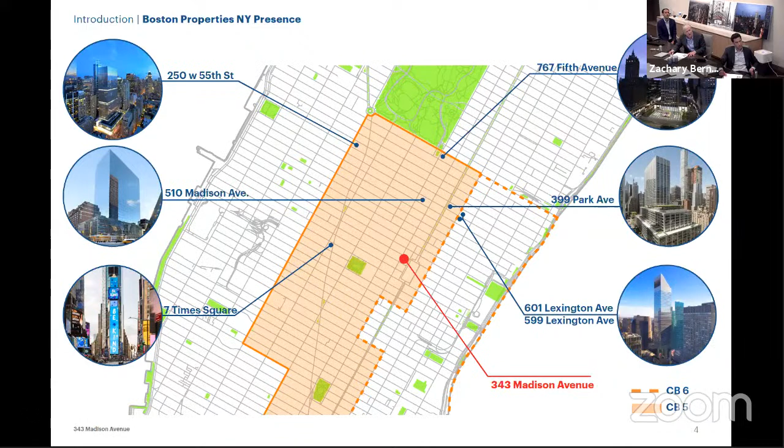We have a track record of building and maintaining transit entrances within our Midtown properties. Shown here is 7 Times Square, which we built in 2004. And most of you are probably familiar with this subway entrance at 42nd Street, which we rehabilitated as part of this development, and we are responsible for maintaining. Next slide.

This slide shows our buildings at 599 and 601 Lex. In the foreground, you can see the 51st Street Station entrance to the 6 and the E and M trains that straddles these 2 properties. Next slide. We recently completed major upgrades to the subway entrance at 601 Lex as part of our overall public space improvements at this property, which were originally approved by Community Board 6 and the Department of City Planning in 2016. Next slide.

Thank you, Rich. On the left here is a map of the East Midtown subdistrict of the Special Midtown District. Highlighted in orange is the 343 Madison site, which is located in a sub area called the Vanderbilt Corridor. This is a 5-block corridor with zoning rules that were established prior to the East Midtown District and apply a little differently. In the East Midtown District, bonuses for transit improvements are as of right and don't require a ULURP application such as we're here with today. However, in the Vanderbilt Corridor, transit bonuses are by special permit only through what's called the Public Realm Improvement Bonus.

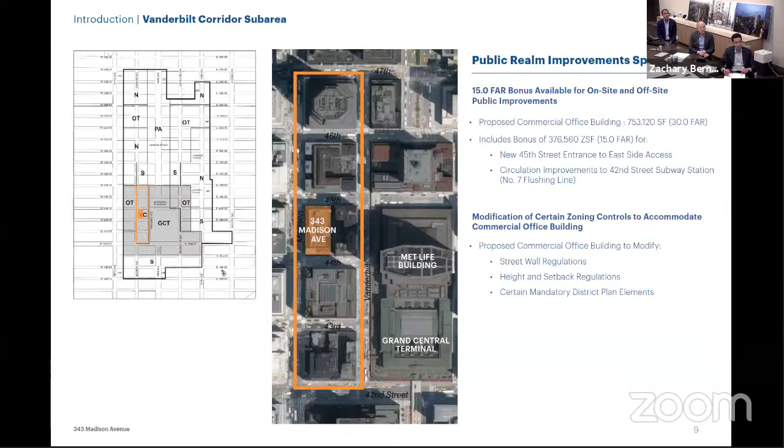The special permit also includes certain zoning waivers for street wall, retail continuity, height and setback, building entrance width, loading, and curb cut regulations. These waivers are similar to those granted for One Vanderbilt and will result in a better site plan and more functional office building. Doug Hocking of KPF will now walk through the building's design, after which Andrew Cleary of KPF and Lisa from New York City Transit will provide the details of the proposed transit improvements. Doug, next slide. Thanks, Zach.

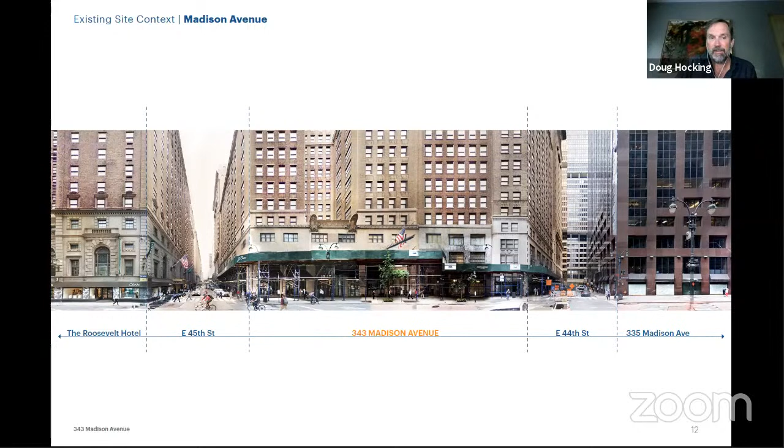Next slide, please. Here is the 45th Street frontage. To the right is the development site. In the middle is a 3-story portion of the existing 347 Madison building, and to the left is 52 Vanderbilt. On the 52 Vanderbilt frontage, you can also see the existing entrance to the Roosevelt Passage into Grand Central Terminal, and this entry will remain in place.

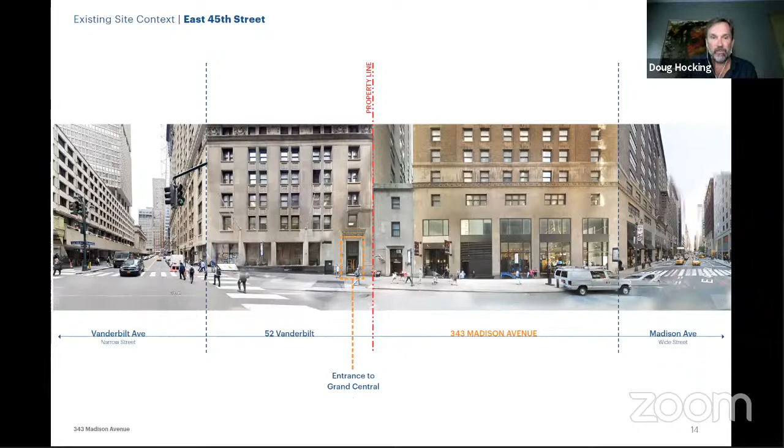Next slide. The site footprint is relatively small for an office development. At 25,000 square feet, it is a little more than half the size of One Vanderbilt just down the road. Within this footprint, the site planning is dictated in part by the vent building staying in place on the south side, as well as the new entrance to the Long Island Railroad, which must be at the 45th Street corner of the site.

We have pushed the building back from Madison Avenue as required to create a 20-foot wide sidewalk. We are also widening the sidewalk on 45th Street to the standard 15-foot width. The building lobby will be along Madison Avenue, and required loading docks will be along 44th Street. The remaining area is dedicated to our core, with the elevators to be on the eastern edge of the site, in what is called a side-loaded core building.

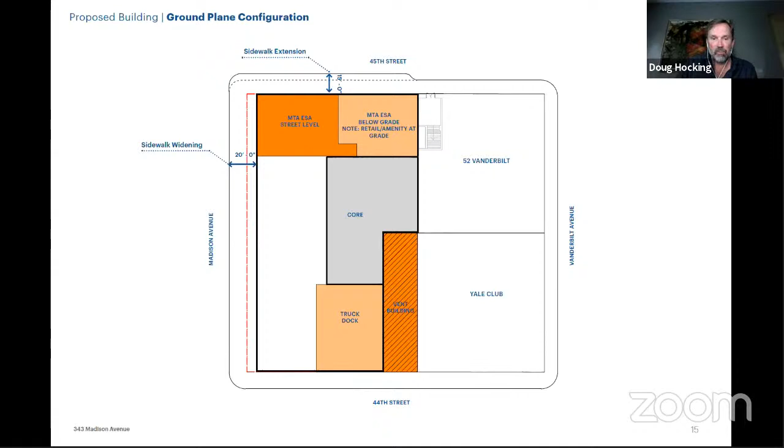The next slide, please. Here is the resulting ground floor. Again, the transit entrance along 45th Street, the lobby along Madison, and the remaining space along Madison and East 44th Street dedicated to retail. Next slide. The architecture of the building starts with looking at its function. Here's an illustration of our initial massing study showing a simple podium and tower, the elevator layered in.

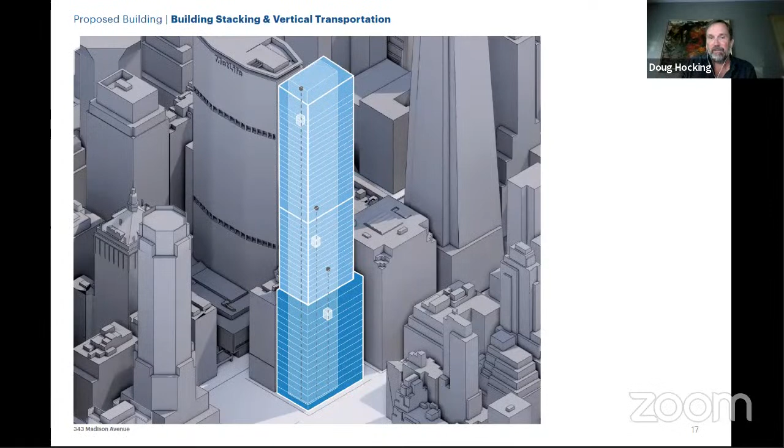Next slide. When we began to think about how to articulate this massing while keeping a functional office building, paying attention to buildings in close proximity and within the Midtown area, perhaps the most important move is the recess along the entirety of the northwest corner of the building, highlighting the new transit entrance as a distinctive element of the streetscape. Next slide, please.

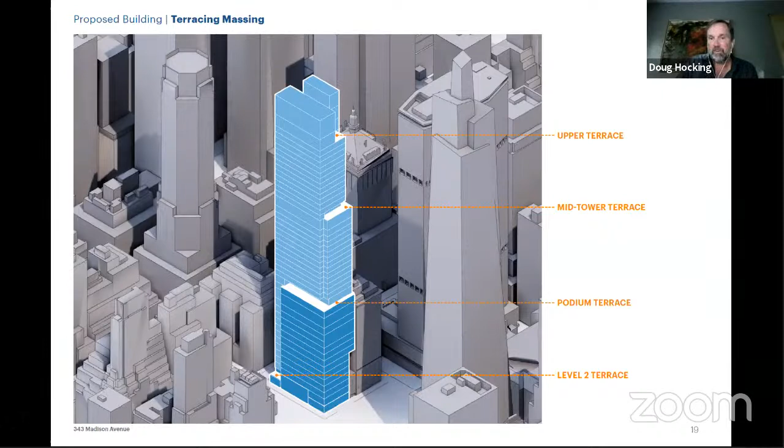Moving up the building, we look for opportunities to break up the building through the creation of recesses, notches, and terracing. The design of the proposed building will also ensure that light and air will reach the surrounding streets and public spaces through the use of these terraces and recesses. Next slide, please.

From a sustainability perspective, we have aimed to exceed the requirements of the 2020 New York City Energy Conservation Code, including by using energy efficient glazing, low flow fixtures, automatic lighting, and state-of-the-art heating and cooling. We also designed with accessibility in mind, following the best practices in universal design. In terms of wellness, our design components include maximizing fresh air circulation, access to outdoor space, attention to space for social distancing in the lobby and other common spaces, and touchless interfaces.

Great, thank you, Doug. So MTA is gearing up for the opening of East Side Access, which will bring Long Island Railroad commuters directly to the East Side for the first time. And this is a detail showing how the project site opens up an opportunity for an entrance to East Side Access. The concourse, shown in cream color, is approximately 50 feet below Vanderbilt Avenue. And the blue rectangles to the east are the Long Island Railroad platforms, which are approximately 160 feet below Park Avenue. And to the north and south of the project site, we'll have entrances to East Side Access.

But as you can see, the southernmost portion of the blue track locations is approximately equivalent to 45th Street. And so the entrance really is at a critical location to allow our customers to exit from this new service out to Madison Avenue. And this entrance is really only possible because the project location is going to be redeveloped. Andrew Cleary from Stantec will walk you through the details of this on-site improvement.

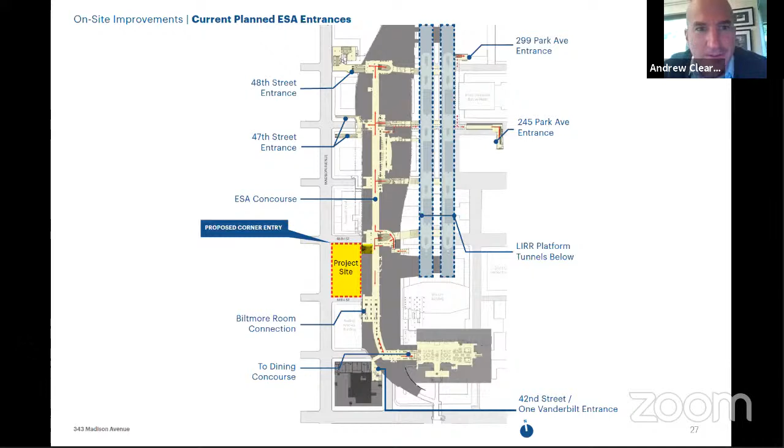I'll do my best. So zooming closer in on the East Side access concourse level, we see the site in dark yellow. As Bob noted, the site is directly adjacent to the escalators that connect down to the south end of the LIRR platform, so very strategically placed.

Next slide. Could you improve the audio, please, Mr. Cleary? I'm not sure how I can. Mute is off. I'll try to talk a little louder. Can you hear me? Much better, thank you. Okay.

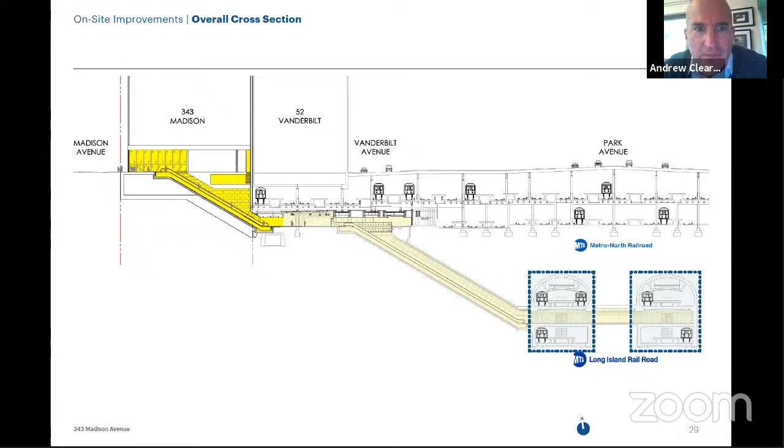If we look at a cross section of East Side access, we can see the LIRR platforms highlighted in blue here at the bottom right, deep below Park Avenue and the Metro North platforms. The site, again highlighted in dark yellow, provides a direct connection to the street from these platforms. A passenger exiting the train would take an escalator ride up to the concourse level, and then, next slide, move up through the site to get directly out onto 45th and Madison.

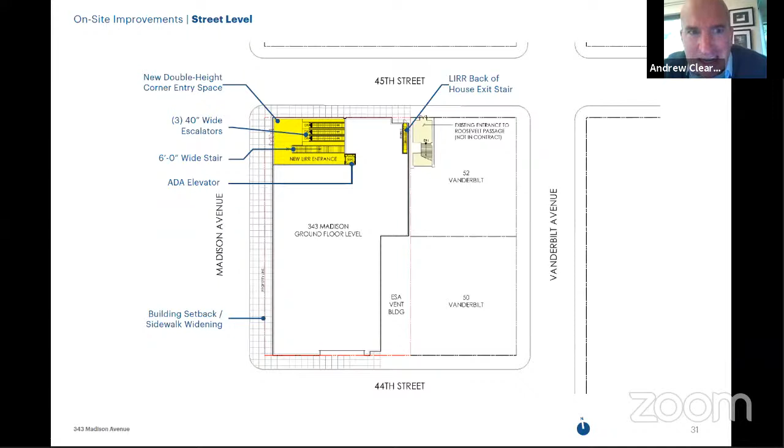A significant amount of engineering work has already gone into the design of this entrance, which will require approximately 50 feet of bedrock excavation to reach and to tie into the concourse structure. Next slide. This slide shows the street level of the project site where we're providing this brand new entrance to Long Island Railroad East Side access at the corner of 45th Street and Madison Avenue. These circulation elements together would have the capacity to serve approximately 10,000 passengers every hour. Next slide.

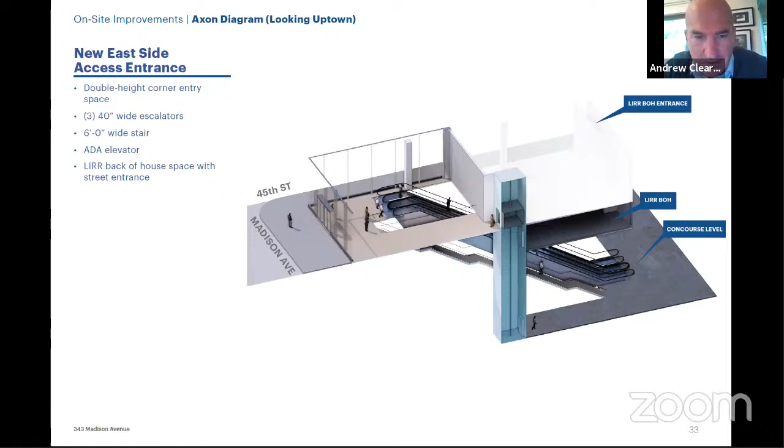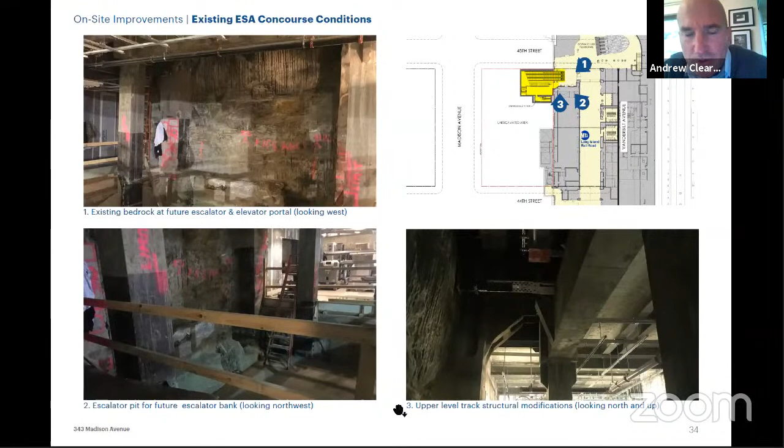Thank you, Andrew. My job at New York City Transit is to help optimize the customer experience. The improvements that will be completed as part of this project were selected because the Flushing line is one of the system's busiest and Grand Central is the second busiest station complex. In connection with East Midtown planning process, we identified circulation improvements to the 42nd Street station of the Flushing line, and these improvements were included in the priority improvement list for East Midtown.

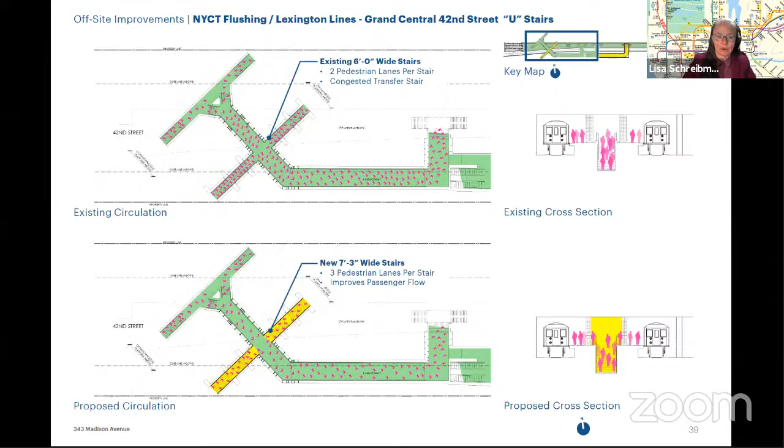On the top of the slide, you can see the existing pinch point for riders going up or down stairs from the Lexington Avenue line. We are proposing to widen the stair, which will add an additional passenger lane. This will improve the dwell times of the 4/5/6 and increase subway on-time performance. Next slide.

Here is an image of the existing condition. Next slide. And here's an image of the proposed widened stair condition. Next slide.

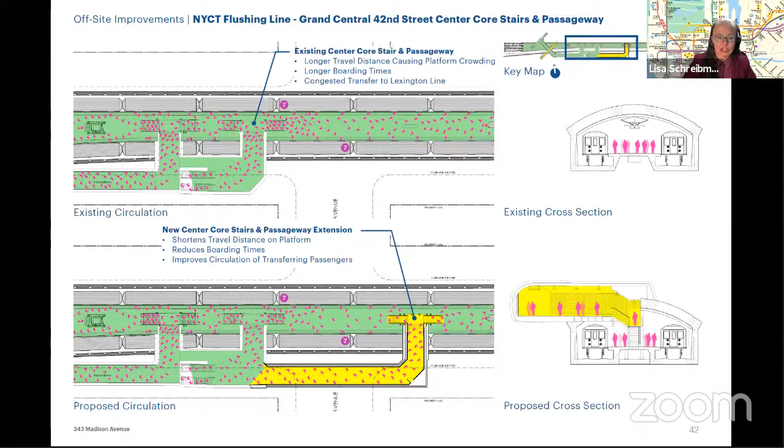Customers transferring from the Lexington Avenue line to the 7 move along a corridor to one of 2 stairs that land towards the center of the 7 line platform. We are proposing adding an additional stair further east and lengthening the corridor. The addition of these significant improvements will reduce crowding on the 7 line platform, reduce congestion, and reduce travel time for customers. Next slide.

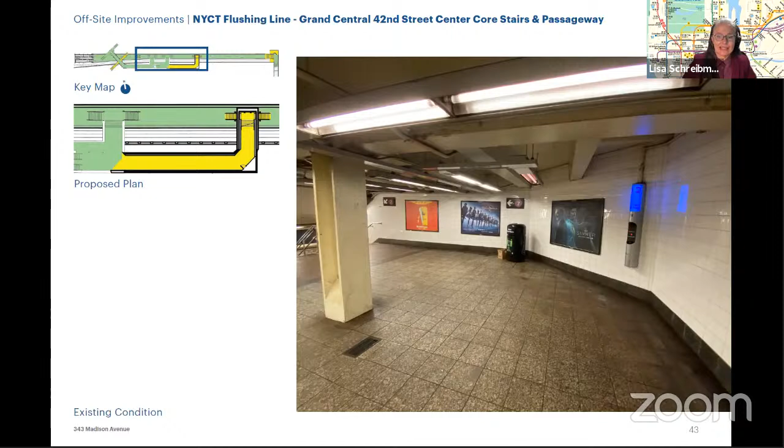Here is an image of where the corridor currently ends. Next slide. And here's a rendering showing the new passageway. The existing wall will be excavated through to create the passageway, and stairs will be added at the end. Next slide.

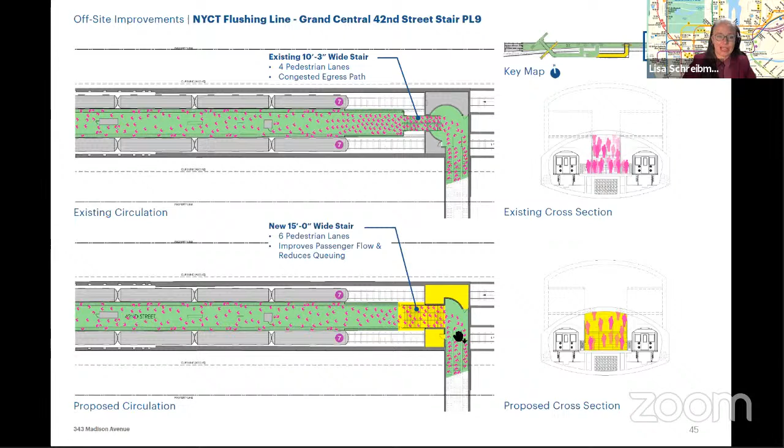Moving all the way east on the platform is a stair which connects directly up to the street. Currently, the stair leading to that circular area that you can see in green is narrower than both the platform and narrower than the stairs that lead to 42nd Street. It'll be widened from 4 to 6 customer lanes, which will provide for improved passenger flow and a better customer experience. Next slide. Here is an image of the existing condition.

Next slide. And here's a rendering showing the 6 travel lanes divided into 3 segments. Next slide. In total, you can see on this slide the 3 major off-site improvements for the Flushing line Grand Central circulation network. We are very pleased to see these improvements coming to a reality, which we believe will provide an improved rider experience and address long-standing circulation issues at the station. I will now turn the presentation back over to Zach.

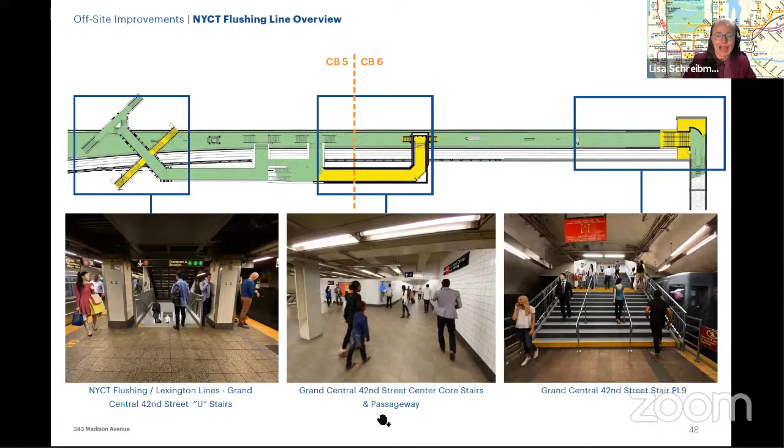I'd also like to note that the project has the support of the Riders Alliance, the New York Building Congress, NYU Rudin Center, Association for Better New York, the Building and Construction Trades Council, and 32BJ. MTA and Boston Properties look forward to completing its work on this project together and discussing further with you. We're happy to take any questions. Thank you.

Thank you. And we're going to take questions from committee members first, and then we'll open it up if there are any questions from the public that are attending the meeting. See if I can. It looks like Larry Shire requests the floor. Larry, go ahead.

Thank you very much. This was a very fine presentation. I would like to ask about one feature in the building and about one feature in CB6. In the building, you had referenced an existing Roosevelt Hotel passageway. There's a branch of that which goes to Madison Avenue. I understand that this project isn't going to affect the part in the adjacent building to the east and the exit to 45th Street. What will happen at Madison Avenue?

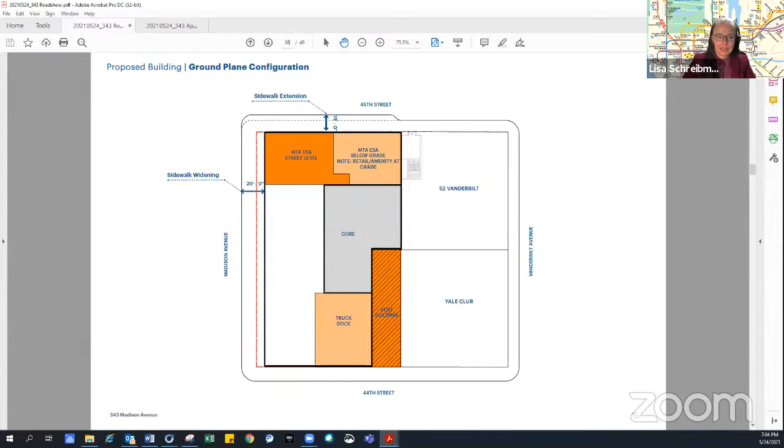So if your goal is never to walk outside, you will be able to do that directly using this passageway. And of course, from Grand Central, you can then access the subway network by paying and coming into the subway. As you mentioned, in the future, when we get to phase 3 of the 2nd Avenue subway, there is also going to be an entrance to the 2nd Avenue subway that will connect from the east, coming into an area, engineering still in the future to be done on this, but considerably farther east, that'll connect into the subway network.

So if you're talking about what the relationship is between this new entrance proposed for 45th Street and Madison to a 2nd Avenue and 42nd Street entrance, it's a long way away. Certainly people will be welcome to walk it. People will have paid a fare to do it. So my guess is that people will use the street network instead if their real goal is to get to East Side access. But some people may think that it's worthwhile paying that fare to stay dry at certain times of the year.

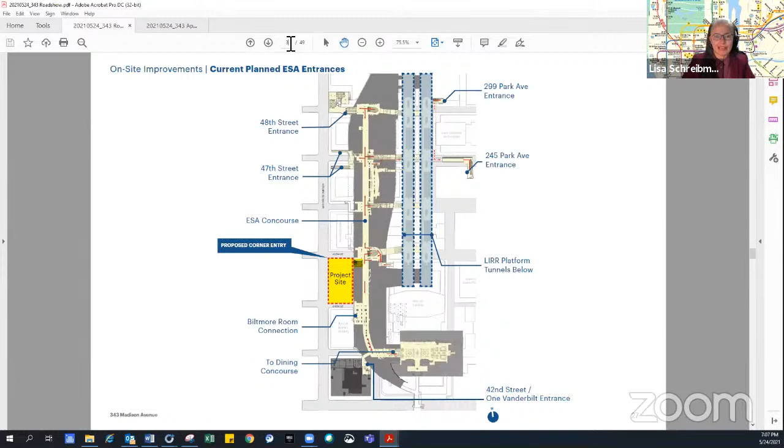So the stairs that we're talking about widening at the east end already exist. Yes. And I don't know the engineering plan for 2nd Avenue subway's connection in, but I can take a look at what that is and get back to you. Okay, because if you can make provision somehow for what will happen when that is constructed, we may not have to build twice. Absolutely. Great. And Jean?

Jean? Yeah, thanks, Sandy. I had to find the unmute button. I wanted to confirm something and ask a question. My understanding from your presentation at CB5 is that there's absolutely no public space inside this building whatsoever. Well, aside from the atrium. Yeah, this public space in 343 Madison is the new transit entrance down to East Side access. That was what the MTA put out in its RFP seeking from developers, and that's the public space within the building. Okay.

But a bigger thing that I was curious about, because I did watch the CB5 meeting, was the funding mechanism for this. So just so I'm clear, MTA owns the building and doesn't pay any taxes because it's a state agency. MTA is leasing the building to Boston Properties for 99 years. So therefore, Boston Properties wouldn't be paying any taxes either. Is that correct? No, that's not correct. Boston Properties is paying to the MTA, in addition to rents, the equivalent of full property taxes. So, right, but that's the PILOT program.

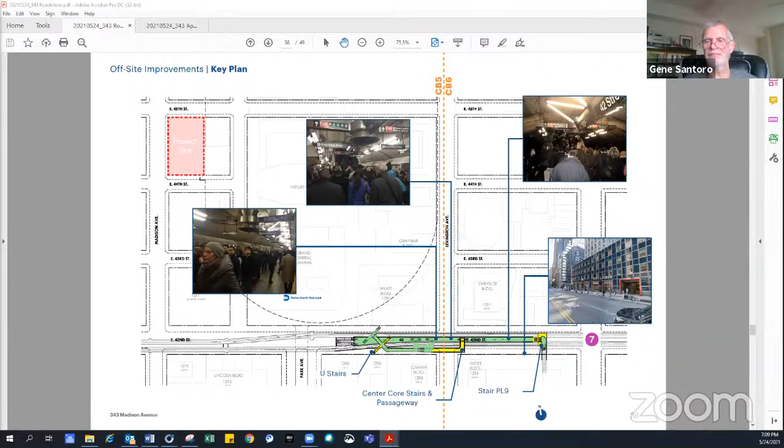So, yeah, go ahead, Bob. Yeah, let me just answer that. Because MTA owns the property, as you correctly pointed out, it is not subject to taxes, but Boston Properties would be paying the equivalent of full property taxes to the MTA. And in this case, as Zach mentioned, we have an agreement with the city of New York on how to invest the funds that come from the PILOT payments. Okay, good. Thank you.

Kavitha, you had a question? Yes. I have a question regarding the full project, but specifically the building, even though I know that it's not within our district. I just want to understand better how the offsite improvements and the East Side access, while they are helpful, useful amenities, equate to essentially doubling the FAR. I think we're going from 15 to 30, if I'm right about that. Could you just go into that a little more? Sure.

The Vanderbilt corridor zoning was set up to facilitate redevelopment of office buildings in this corridor, allowing for the text as written in 2015 or 16 to allow for bonuses of up to 15 FAR. On a small site, 15 FAR is a smaller amount of floor area; on a large site, it's a larger amount. At One Vanderbilt, for example, the site is much larger, so an additional 15 FAR gets a lot more floor area. Here, the 15 FAR is 376,000 square feet.

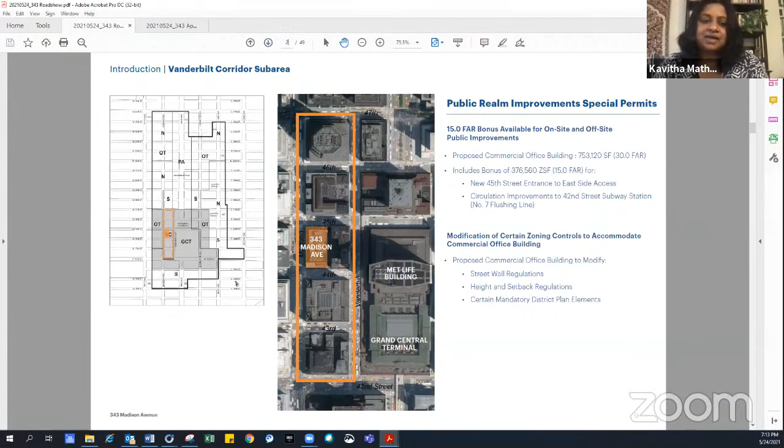Well, one other thing I'll say is it's a relatively small site for an office building, and in order to have functional office floor plates, you need to utilize a certain amount of the site for your core, with elevators and circulation space around that. So the design reflects an iterative process to have a functional building, and it steps back where the number of elevators drop off, because not every elevator goes to the top of the building. Where there's less space taken up by the core and elevators, the building steps back while still preserving a functional floor plate. That's essentially how the design was approached — a balancing of function and form.

I'm afraid I can't see everyone who is on my screen. Were there other questions from our committee? It does not appear that there are at this time.

I know we did have some questions regarding the daylighting and how much it varies from what is allowed in the Vanderbilt zoning. Could you elaborate on that, please?

Sure. Going back to East Midtown as a reference point: the East Midtown rezoning, which is as-of-right and doesn't require coming back for special permits, recognized that the zoning originally established for Midtown for 15 FAR buildings wouldn't have fit the larger buildings that the recent East Midtown rezoning permits, and so relaxed the original rules established under the Midtown zoning district in the 1980s. But in the Vanderbilt corridor, those rules are not relaxed — they're still the 1980s rules for 15 FAR buildings. You simply can't fit a bonus building within the way those rules were constructed.

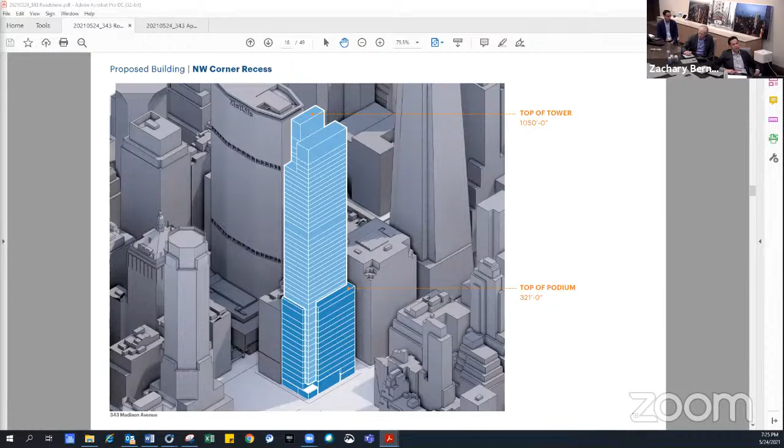There's also a question about who approved these waivers. Actually, I think that's the process you're going through, looking for approval of the waivers, if they have not been approved to date.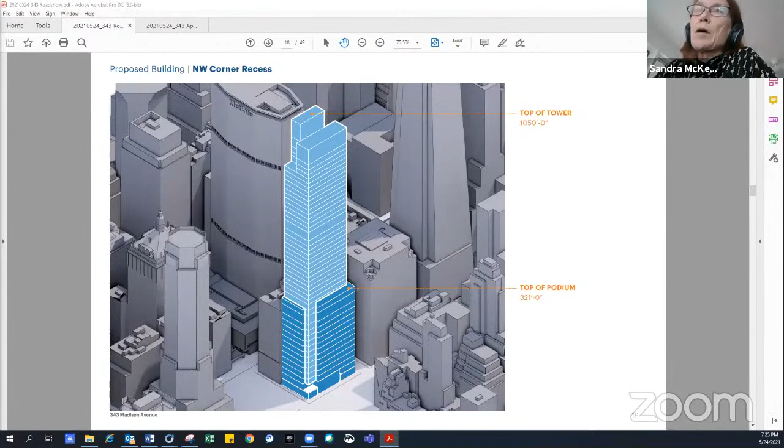Thank you, my name is Ryan Pukos, I'm a senior project manager with the Grand Central Partnership. The Grand Central Partnership is a business improvement district serving an approximately 70 square block area in Midtown East surrounding Grand Central Terminal. As one of the world's largest BIDs, serving a district with 73 million square feet of commercial, residential, and retail building space, our goal is to keep our Midtown East neighborhood clean, safe, and thriving. We believe that the redevelopment of 343 Madison supports this goal in three important ways.

First, the redevelopment will unlock privately generated revenue that can be used to make transit upgrades to enhance connectivity and safety in the district, including improvements to the 7 line platform and the Grand Central 42nd Street subway station, which falls within Community Board 6. The redevelopment will also enable a new state-of-the-art transit entrance on Madison Avenue with direct connection to Grand Central Terminal and to the new East Side Access Long Island Railroad terminal.

Second, 343 Madison addresses a long-term challenge for our district by replacing aging commercial infrastructure with a modern, efficient, and sustainable Class A office building, which was one of the most critical goals of the 2017 Greater East Midtown rezoning. The new building will help attract and retain world-class talent and businesses that seek new construction and flexible office space.

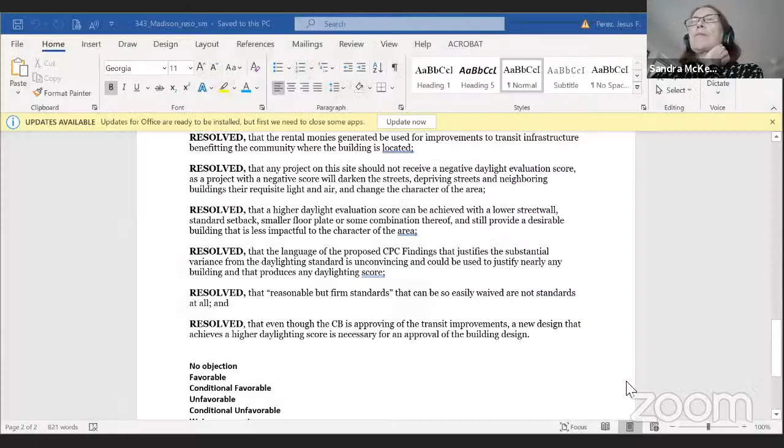Thank you. Seeing no other comments, we'd like to go ahead and review a resolution. And in terms of timing, I believe we have to respond to this proposal within a certain time frame. So I'm not sure we have the option to actually not form some sort of response this evening. It will, of course, go before the full board before decided on.

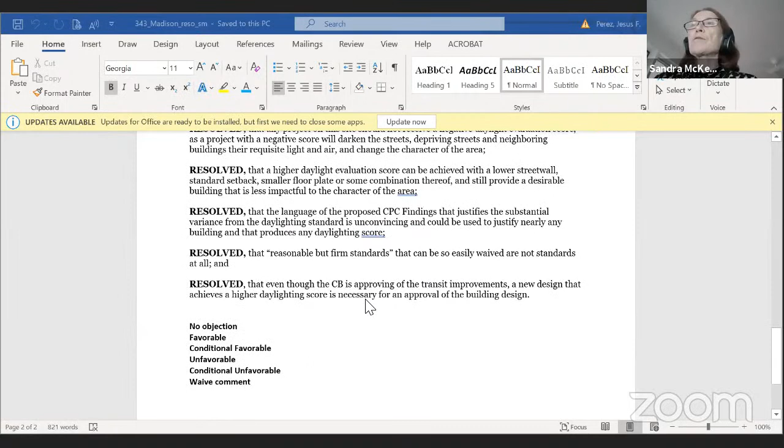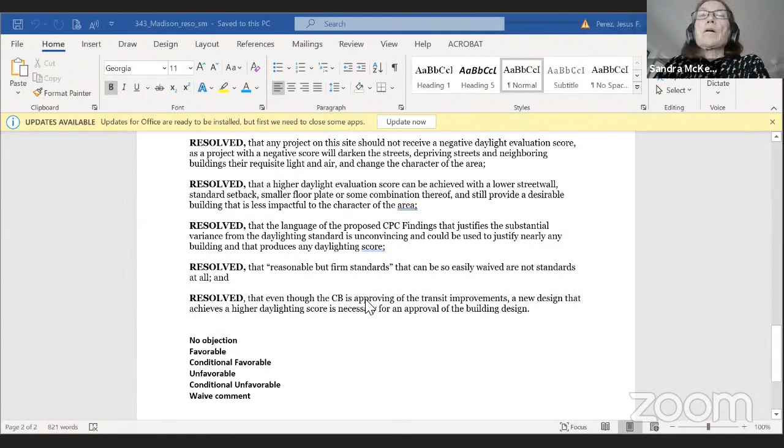So we have several options for how to respond. No objections, favorable, conditional favorable, unfavorable, conditional unfavorable, and waive comment are all of the different positions that we can take. There was a draft resolution that was distributed today, and we should discuss which direction we would like to go. The draft resolution covered some of the issues that we've discussed here tonight. I think it focuses on light, on our concerns with the height of the building.

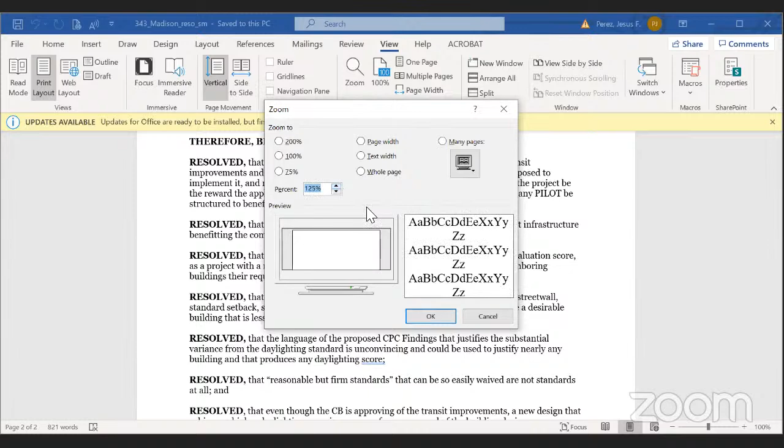Do we have any comments on the proposed resolution? Letty? I see your hand is raised, Letty. Would you like to go ahead? Yes, if there are no questions, can we call the question? If there are no comments? And I would just like to clarify which position we would like to take out of those that we have identified. We haven't specifically said whether we are conditionally favorable or conditionally unfavorable, or no objections. I think we do have objections, so that probably is not one of the options.

Jean? Yeah, excuse me. I'd suggest that of those options, we do conditional favorable. We're clearly not going to stop this project, no matter what we do. It's already in progress. But I think we should try to get some more juice back from what it is that they're doing with the curtain walls and everything else. So that would be my suggestion. Okay, do we have any comments on that proposal? All right, should we go ahead and vote for a conditional favorable based on the resolution that was distributed today?

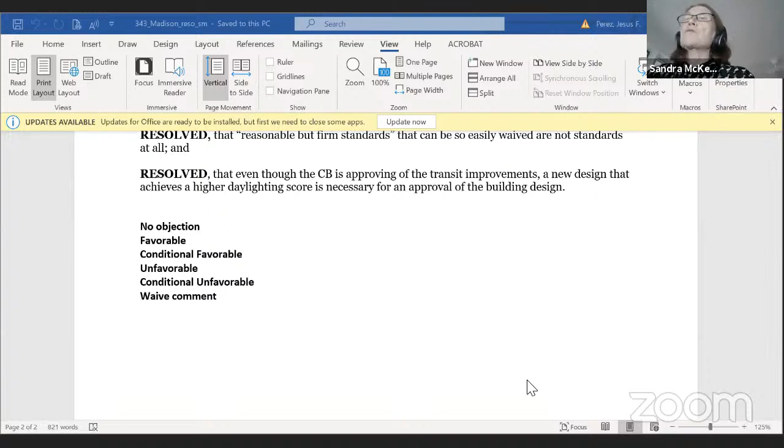Okay, I think Jesus, we're ready to take a vote. Oh, sorry, Jean, your hand is still up? No, Wells, did you have something you wanted to add? Yes, Danny, thanks. I was wondering if we might want to add to this resolution concerns about the pedestrian experience as a result of some of this, just highlighting some of the concerns beyond just the daylighting, which seems to be the main focus of this. Are there other concerns that were raised tonight that we would want to weave into this?

And I think absolutely, if there's anyone else who would like to support that idea of adding some comments about the pedestrian experience. Kavitha? I just wanted to support that. And also what Wells brought up earlier about a little more information about the sustainability aspects of the project, if we want to work anything in about that as well. Any other comments? Seeing none, I think we can vote on the resolution. Jesus, if you wouldn't mind.

All right. If I have it correct, we will be voting on a motion to pass a conditionally favorable resolution for this project. Have I got that right? That's correct. Okay, so I will call each committee member's name, and they will vote either in favor of a conditionally favorable resolution, opposed to a conditionally favorable resolution, or abstain on this matter. We normally have abstain for cause, but in the land use resolutions that we have to submit, abstention is an abstention. So in favor, opposed, or abstention are your options.

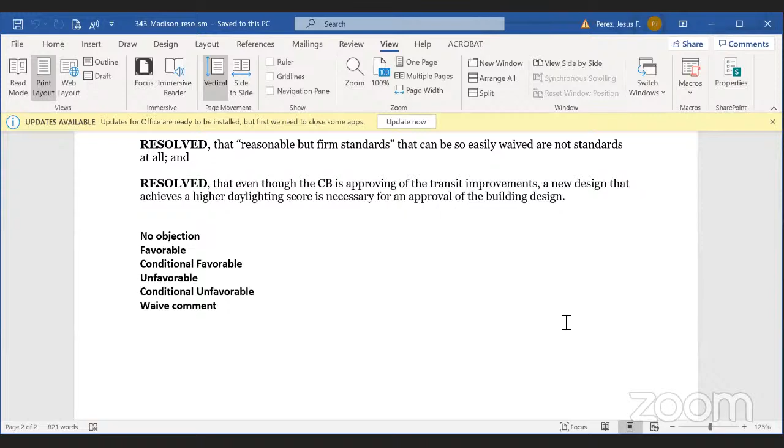One second. That is my mistake, I'm very sorry. I was assuming that we had a full deck. Yes, 6 in favor, 4 abstaining does pass. My apologies for that. Okay, thank you.

The public hearing for ULURP application by BP 343 Madison Associates LLC and the MTA for 2 Vanderbilt corridor special permits, ZR 81633 and 81634, to redevelop 341-347 Madison Avenue with a maximum 30 FAR commercial building is now closed. Thank you for your time. Thank you.

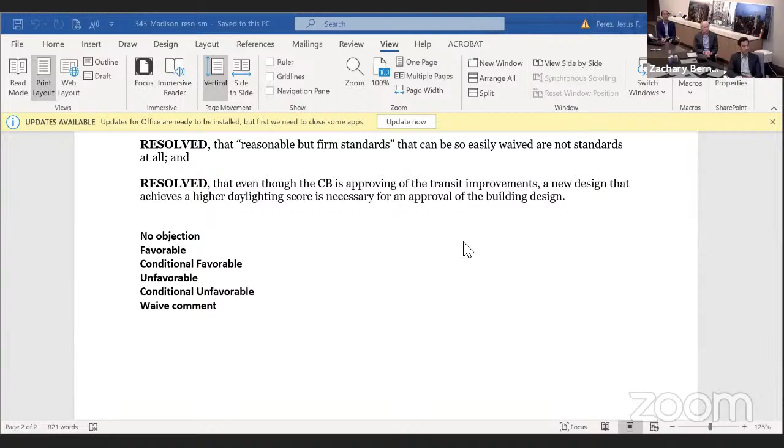Okay, next, the public hearing for citywide text amendment N210270 ZRY that will allow the MTA to work with private developers to make more subway stations ADA accessible is now open. If any members of the public want to make remarks on this matter, please type your remarks in the question and answer feature. And City Planning is now up.

Good evening, everyone. Thank you for having us tonight. It's nice to see you all. So today we will be presenting Zoning for Accessibility, which is a joint application by MTA and DCP. And this is for a text amendment that aims to improve ADA accessibility throughout the city. Tonight, I'm also joined by Marcus Book and Howard Levine from the MTA, who will be making this presentation with

me. So if you want to hear more information about any of the proposal that we present today, we can stay for questions, and additional information, including the detailed project summary and the entire annotated zoning text, is also available on the DCP ZAP search portal. We can follow up on any questions we can't answer today. And what we're asking for is your recommendations for the City Planning Commission about the proposal. Official recommendations from all 59 community boards, borough boards, and borough presidents are requested by June 14th, 2021. Now, I will let Marcus start us off with an overview of the background and the goals of the proposal before going over the zoning specifics.

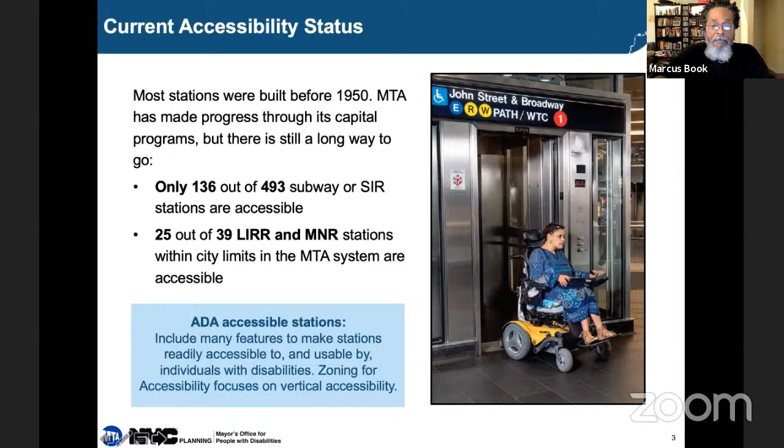So what are the impacts of limited elevator access in our system? Increasing accessibility is a key step in modernizing the city's transit system, as the lack of elevator access in stations affects many New Yorkers who have a hard time navigating stairs. These riders include people with physical disabilities, our seniors, parents with young children, people with temporary injuries, and even just people who are transporting heavy objects. And in order to navigate the system, these customers rely on accessible stations, which may not be close to their origin or destination point. The result is that a subway ride that should take minutes can take hours. And for these transit riders, more elevators throughout the system would allow for shorter, more direct trips.

And this segment of the population is not insignificant. Of the 8.4 million residents in New York City, over 500,000 have an ambulatory disability, and more than 14% of the population is over 65. Moreover, the number of seniors in New York is growing at more than twice the rate of the total population. As the city's population is growing older, there is increasing reliance and need for accessible stations. Making the system accessible for all of our customers is an urgent priority for the MTA.

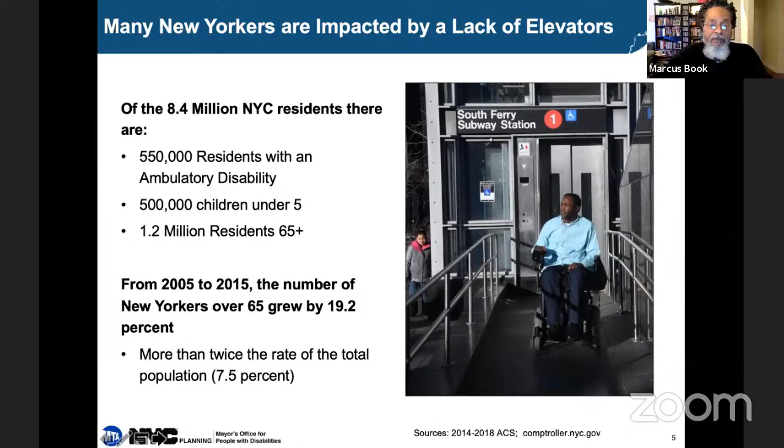So to address these deficiencies in our current transit system, the MTA prioritizes accessibility improvements and other station improvements in their capital programs. The current 2024 capital program dedicates over $5 billion to making 77 subway, Metro-North, and Long Island Rail Road stations accessible. When the capital program is completed, 43% of subway stations will be accessible.

Additionally, a key goal of the capital program is to ensure that no subway rider is more than 2 stations away from an accessible station. The current capital program targets stations in all 5 boroughs in order to ensure this goal is met. And in spite of the ongoing pandemic, the MTA is acting on these goals. In the last year, the MTA opened 11 new ADA stations and awarded more than a dozen new ADA projects.

But as many of you know, the progress can be slow because elevator construction in subway stations is particularly challenging for many reasons. As I've mentioned before, stations are old and can have complex infrastructure, which make installing an elevator expensive or in some cases impossible.

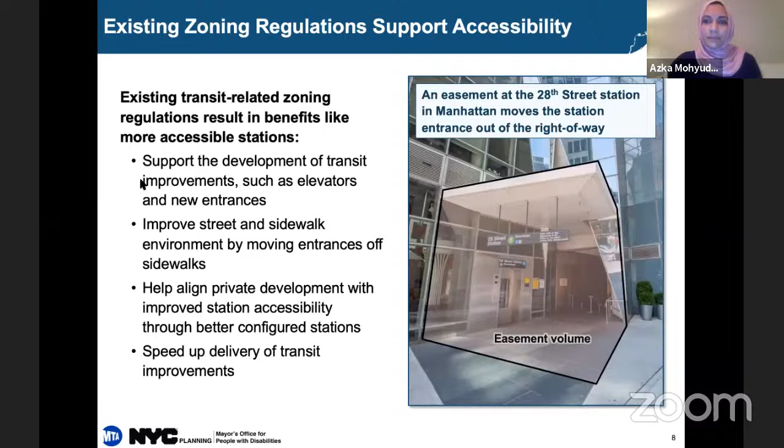So by leveraging station access improvements in places where investment is already occurring, these provisions speed up the construction of station improvements for increased accessibility. However, these current provisions have certain limitations that ZFA is aiming to address. First, let's look at the current easement provisions. So these easement provisions address challenges of locating new station entrances and other transit amenities.

An easement is a small permanent space reserved in a building for a transit agency to use in the future. Transit easements have traditionally been used to provide space for new station entrances, passageways, or ancillary facilities that support subway lines, such as emergency egress or ventilation structures. However, the existing easement provisions are limited to a few areas in the city, such as this along 2nd Avenue for the 2nd Avenue subway line. And as a result, there have been missed opportunities for MTA to locate ADA access at optimal locations on development sites next to a station.

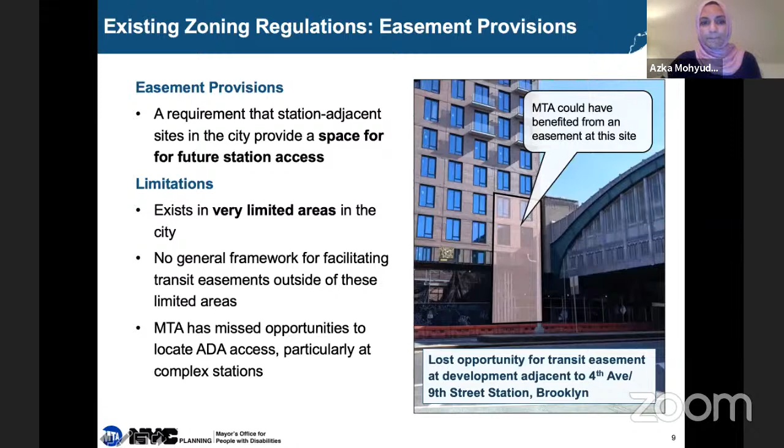Second, the zoning resolution contains a transit bonus mechanism that supports the creation of transit improvements. In the densest commercial districts in the city, we've incentivized developers to both provide the space and to construct station improvements, including ADA access, through floor area bonuses that provide additional development rights, as you saw in the previous application today. However, these provisions are also limited to certain sites immediately next to subway stations in or near central business districts in certain areas of the city.

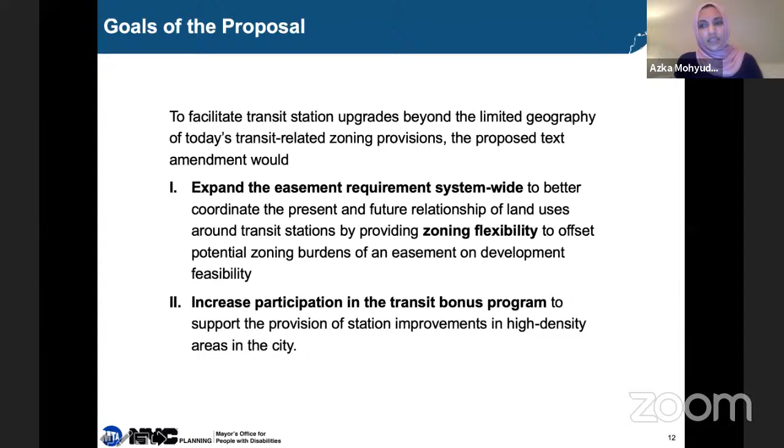So to address these limitations, the Zoning for Accessibility, or ZFA, is seeking to create more opportunities for accessibility throughout the transit system through expanding these zoning tools available to us. ZFA proposes to first expand the easement requirement system-wide to most transit-adjacent sites and provide zoning flexibility on sites where easements are provided to offset potential burdens on development feasibility. And second, to increase participation in the transit bonus program by increasing its area of applicability to other high-density areas in the city.

I will now go through the first component of this, the system-wide easement requirement. This would require all developments and enlargements on zoning lots within 50 feet of a mass transit station and in applicable zoning districts to file an application with the MTA and the chairperson of the City Planning Commission to determine whether an easement is needed on that zoning lot for future station improvements. However, while the certification would be required for all sites within 50 feet of a transit station, it is anticipated that MTA will only ask for an easement in limited places that are best suited for access or require their improvements.

Looking specifically at Community District 6, this illustrative map shows where ZFA would be applicable. The red line shows the boundary of CD6. The light green dots show the stations where the proposed easement requirement would be in place, which in CD6 includes all the stations. And the dark green areas around these stations show the zoning lots within 50 feet of an eligible station where an easement may be required for developments or enlargements.

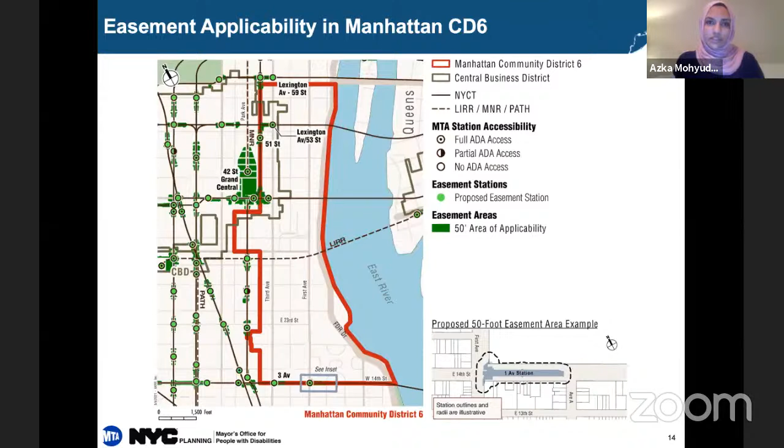Because of this variation in easement shape and size, easement areas can affect development sites in a number of ways. The easement can take up floor area by occupying several floors on a site. It could restrict ground floor uses and even create compatibility issues with surrounding uses. So without any zoning relief, a development could be limited from building to its full allowable potential.

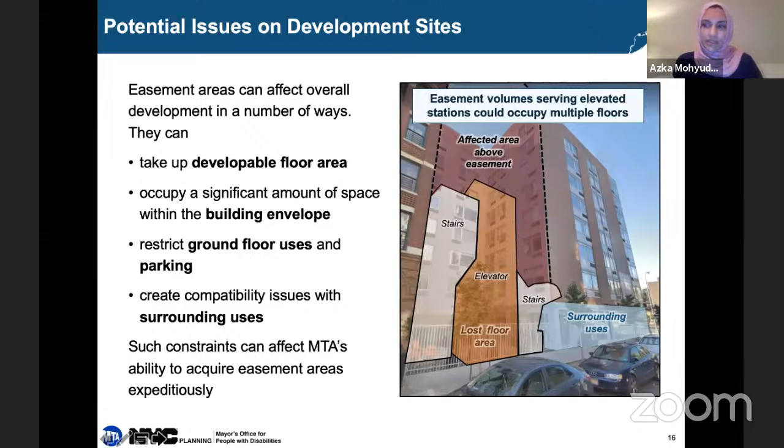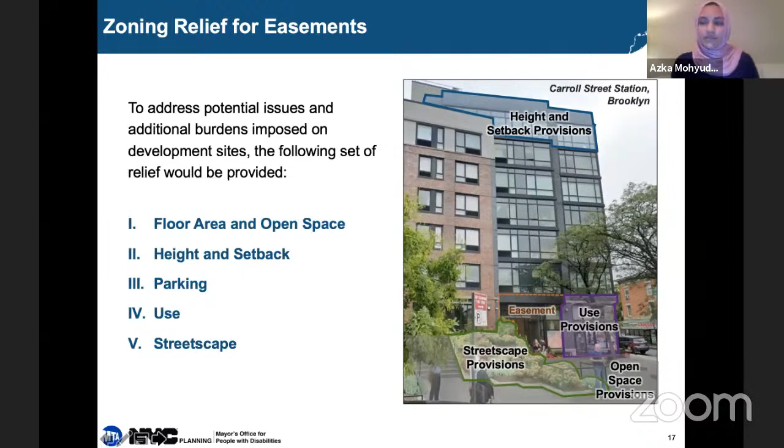To make sure an easement creates minimal challenges for construction on a given site, the zoning will provide targeted relief to sites required to provide an easement. The categories of relief are floor area and open space, height and setback, parking, use allowances, and streetscape provisions. I'll now go over 4 of these provisions that apply to CD6.

So the proposed floor area and open space relief includes excluding the easement from the floor area calculations. This allows the development to reach its maximum allowable FAR despite the easement. And to make sure easements are placed at an optimal location on site, they would be considered permitted obstructions, and where applicable, maximum lot coverage would be increased.

In CD6, the proposed height modifications would allow for sites to increase their maximum height by 10 feet to allow for developable floor area space that would be taken up by an easement. There would also be greater street wall flexibility provided within 15 feet of an easement to create better flow around these spaces.

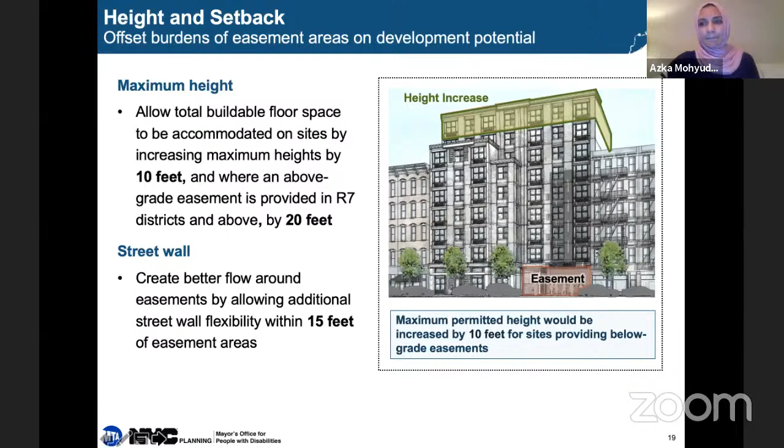Use allowances are proposed to help activate spaces around easements. This includes allowing vacant easements to be temporarily used as commercial spaces and allowing local retail uses within 30 feet of easements in residential districts.

Modifications to streetscape requirements would be provided to exclude general streetscape rules like ground floor use regulations, transparency rules, and plantings, and to ensure the safety of transit users entering and leaving stations, curb cuts would be restricted within 30 feet of an easement.

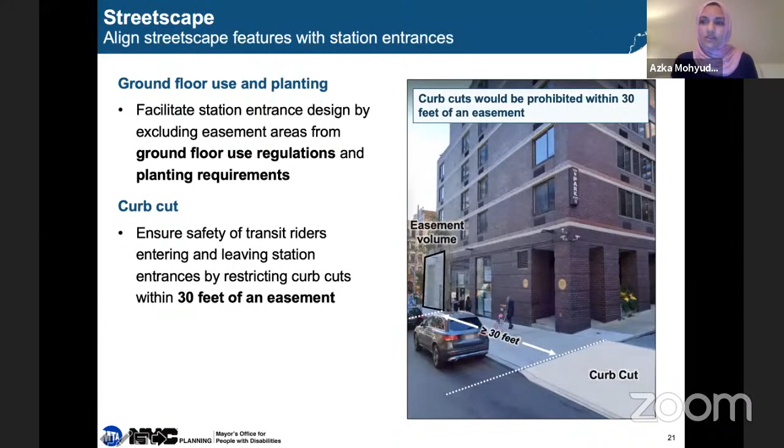Every site is unique and has potential additional challenges, however. So this proposal allows for further flexibility for uniquely constrained sites through an additional authorization, which is a discretionary action. For height specifically, sites could seek an additional height increase of up to 25%. However, if they request more height relief beyond that, they would need to seek a special permit.

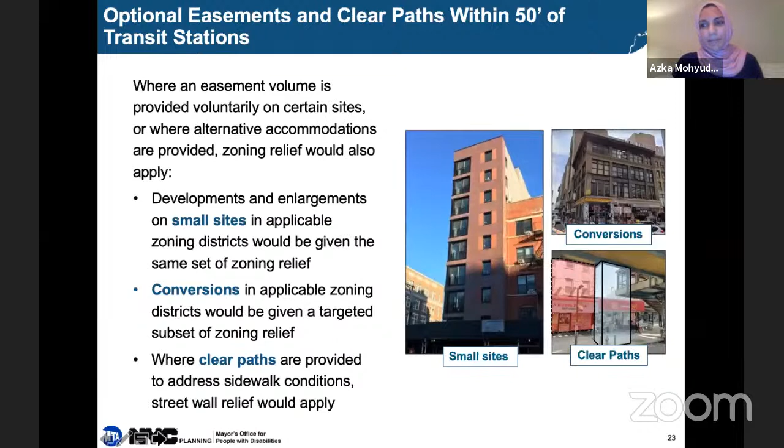While the easement requirement only applies to developments and enlargements on sites with a lot area of at least 5,000 square feet and in applicable zoning districts, easements may also be provided voluntarily on smaller lots. For these sites that choose to provide an easement, the same zoning relief would apply. So this concludes the first part of the proposed ZFA. I will look over the proposed bonus mechanism.

The second piece of the proposal is an expanded transit bonus program that would be optional for sites that are near a mass transit station. As mentioned earlier, today's subway bonus mechanism grants a floor area bonus of up to 20% for a significant station improvement, but only applies to station adjacent sites in limited areas of the city.

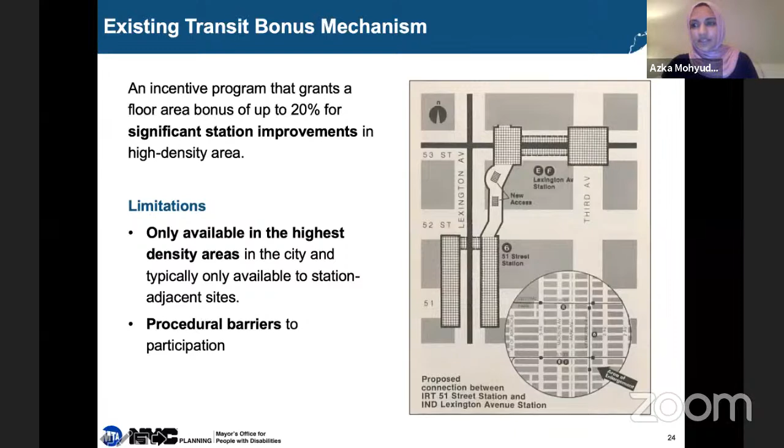With ZFA, the proposed transit bonus program would continue to grant its floor area bonus of up to 20% of the maximum floor area ratio for developments and enlargements that construct station improvements. And it would expand the geography of where a transit bonus can be used. The bonus would be subject to a discretionary review process in the form of an authorization by the City Planning Commission.

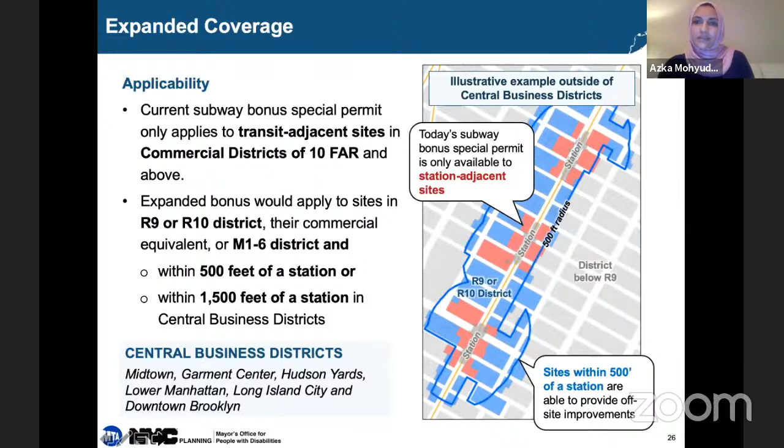The proposed bonus would expand the geography to other high density areas, including all R9 and R10 districts in the city, their commercial equivalents, and M1-6 districts. The new transit bonus would allow sites that are within 500 feet of a station to participate in the program in exchange for an offsite improvement that would be constructed at a station that is not immediately adjacent to the site. In central business districts, this would be expanded to 1,500 feet.

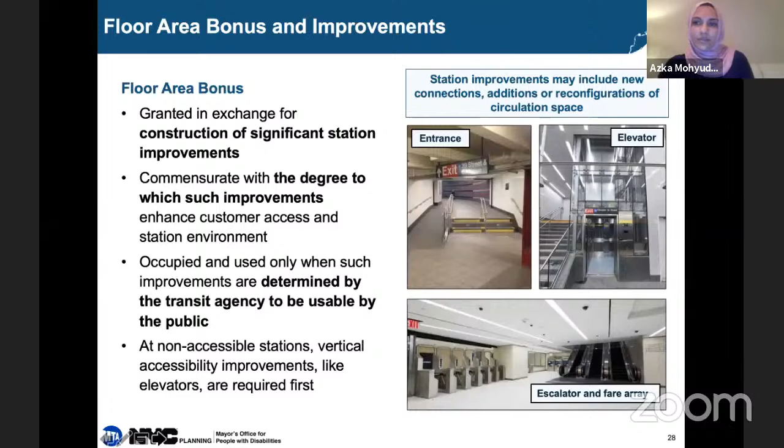To receive a bonus, a development must construct a significant transit station improvement. The improvements can vary depending on the station needs and the bonus amount sought. However, if a station doesn't have ADA access, that would be the first improvement provided. The amount of bonus would be proportional to the improvements provided, up to 20%. The floor area generated from the bonus may only be occupied once the MTA determines that such improvements are usable by the public.

If needed, developments could seek additional relief from zoning provisions. Depending on what the applicant seeks, the modifications may either be subject to an authorization, which would allow a height increase of up to 25%, or a special permit if further height relief is needed. Other relief that would be made available through discretionary review approval includes modifications to use, parking, loading, and streetscape. Modifications pursuant to the authorization or special permit will be subject to specific findings to prove that the relief is necessary.

So in conclusion, zoning for accessibility proposes, one, a system-wide easement certification requirement for all new developments or enlargements on a minimum 5,000 square foot lot within 50 feet of an MTA station in applicable zoning districts to determine if they must provide an easement on site. There are also voluntary options for smaller lots and conversions within applicable zoning districts. This is the only non-discretionary review proposed.

ZFA also proposes an expansion of the transit bonus program, which allows a floor area bonus in exchange for significant transit improvements through an authorization. Both the easement and the bonus provisions also allow for further zoning modifications due to possible unique site conditions through additional discretionary review. An authorization would be required for modification, including a height increase of up to 25%, and a special permit is required for further modifications.

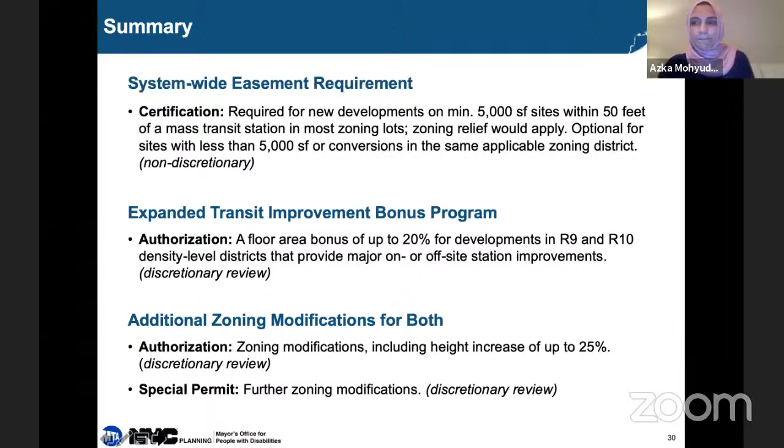As I mentioned in the beginning, we are currently in the public review process of this text amendment. We're asking for your recommendations for the City Planning Commission about the proposal. Official recommendations from all 59 community boards, borough boards, and borough presidents are requested by June 14th, 2021. Thank you for your time, and we're happy to answer any questions.

Gene, please go ahead. Oh, thanks. Okay, I have a question and sort of a comment. First question is something that someone in the chat has been raising, and I had in mind too. These various easements, who is going to be responsible for maintaining the spaces, maintaining security in the spaces? What kind of agreements are going to be built around those that are hopefully ironclad so that things like elevators staying broken for 1.5 years or 2 years, as happens now, won't be happening in these situations? Yeah, so that's a great question. Howard from MTA can answer that.

Hi, Gene. It's good to see you, and good to see a number of other familiar faces. Still Howie, by the way, not Howard. But I didn't know who Howard was. Okay, Howie, how are you? It's good to see you, Gene.

So in general, with the easement specifically, the easement is just the space the developer sets aside. And then there might be some time before the MTA comes back and builds in an elevator or new station entrance, whatever it might be. Before the MTA starts that construction process, it's the responsibility of the building owner. And in fact, they can actually use that space for commercial or community use before the MTA requests that we're going to start our construction process on that space, because depending on the exact situation and improvement, it may be some time before we come back to build it.

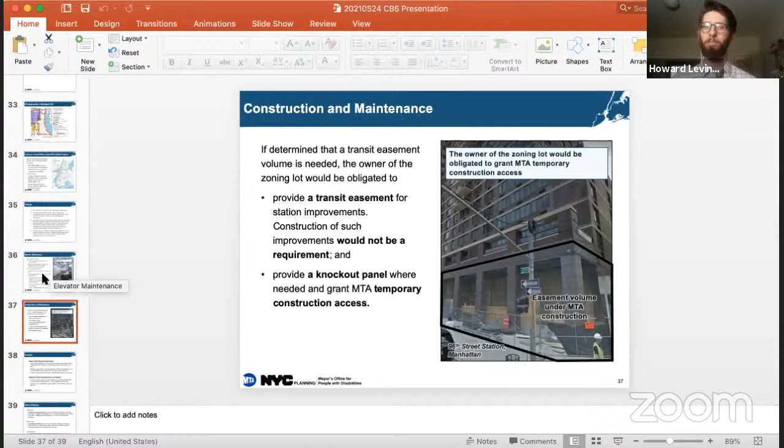Once the MTA starts construction and the improvement or the station access point is completed, then it becomes the responsibility of the MTA. It's really no different than a current MTA-maintained entrance that you'd see in the system. In part because the MTA builds that entrance, it is considered an MTA entrance, even though it's technically on an easement. And I think I've been seeing the same questions in the chat.

So generally that applies as well to the bonus and those improvements built out by developers. Azka has brought up a slide particularly talking about elevator maintenance. Generally, elevators in easements will be maintained by the MTA. Elevators built by a developer outside of their building footprint—Azka mentioned you don't have to be adjacent to the subway station.

You can be up to 500 feet away, or 1,500 feet away in a central business district. In a lot of cases, the developer may be building the improvement, but it's going to be on the sidewalk or within the MTA station entirely. In that case, the developer will build it and then enter into a maintenance buyout agreement with the MTA, with us, and the MTA will be responsible for the actual maintenance.

In certain specific instances where the developer is adjacent to a station and the elevator is built within their building footprint, they will be responsible for maintaining it. As Bob Haley mentioned earlier, we've learned a lot over the last number of decades with our easement agreements. Any easement agreement, whether through ZFA or through other provisions for improvement and elevator maintenance, has to include a number of mechanisms in a binding legal agreement with the developer.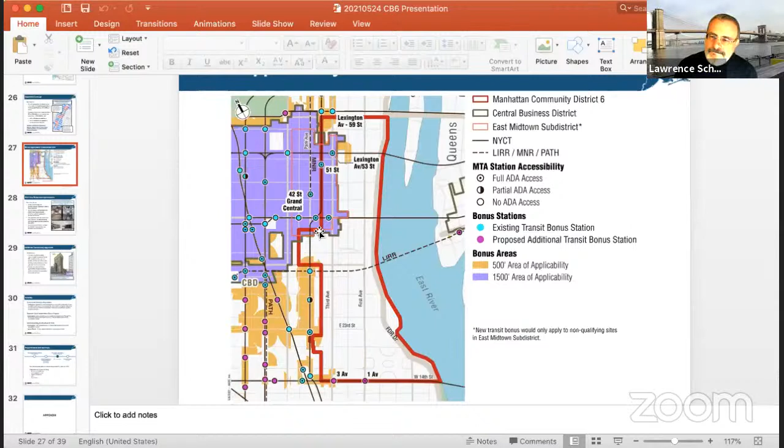Sorry, can you hear me, Sandy?

Could you clarify, you said this really quickly and maybe I missed it, how the bonus applicability works with off-site improvements? You mentioned something about the ability, if you have an adjacent site or a site where you would make an improvement like this, is there a way to use the bonus on a separate site that is not that site?

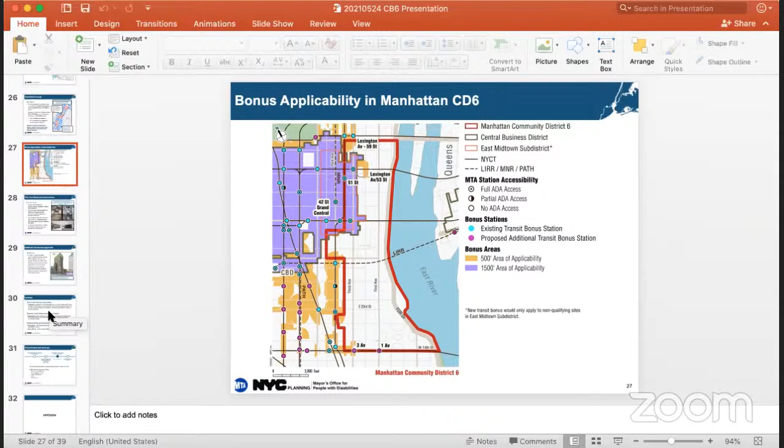Yes, so to clarify the applicability: for areas within 500 feet of a transit bonus station, any site can apply to this program, but that doesn't mean they can use the FAR off-site. If a site is applicable, they will be using the FAR within their own site, but the improvement they're providing will be off-site. For example, if a site is getting a bonus on a corner here, they would be providing the improvement within the 3rd Ave station. So it would be off-site for the site providing the improvement, but the FAR itself wouldn't be off-site.

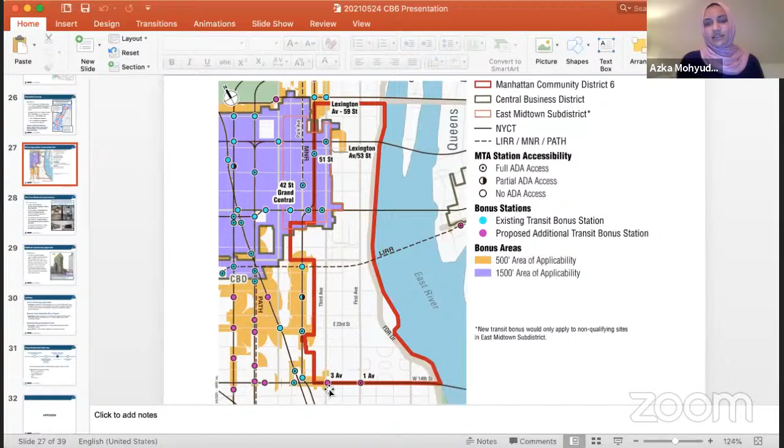Okay, that clarifies it. Thank you. No problem.

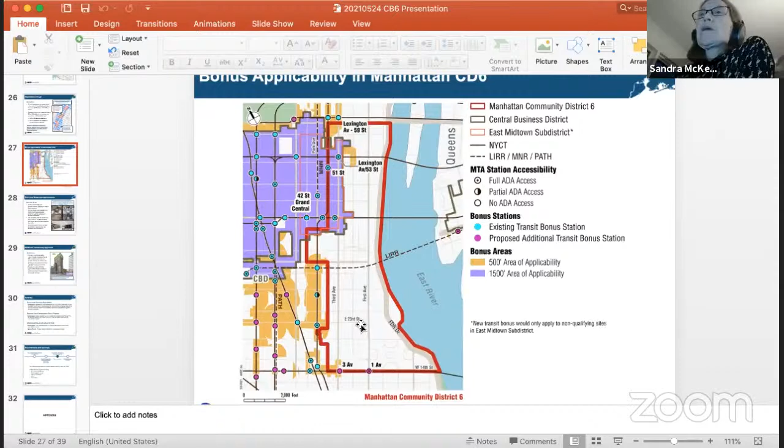Do we have any other questions from committee members? We have a few questions from the public.

In support of ADA access, the question is regarding whether AutoGate is open to anyone who needs an elevator for bicycles, luggage, etc.

Sure, so right now AutoGate, for those who don't know, is a program where there are automatic doors at subway entrances. If you have a reduced fare MetroCard and you swipe it, it will automatically open the door because you have some form of mobility disability. That exists currently, but it's only for certain reduced fare cards, not anyone with any MetroCard can use those gates. That's not really part of this proposal, but I hope that answers the question.

Okay, and then Elizabeth Axel asked if she could state her position herself. Jesus, if you could give her 2 minutes of comment, please. Axel, you have the floor for 2 minutes.

Thank you. As a longtime advocate for a fully accessible subway system, the lack of an accessible subway system impacts me and other disabled people's ability to lead the lives we'd like to live in New York City. My parents live within Community Board 6. An elevator is an important accommodation for me when vertigo and other issues make it very difficult, and on occasion impossible, for me to navigate stairs. I need the access elevators will provide. We need to build hundreds of new elevators to make the system accessible to all riders. I understand the scale of this challenge is enormous.

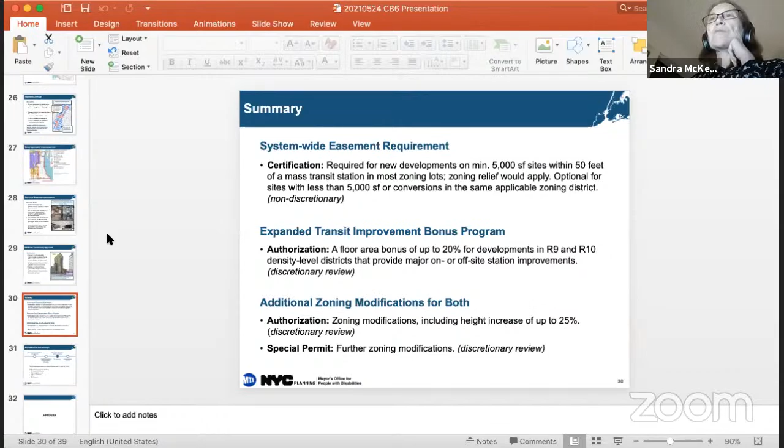Great, thank you. And I think we'd like to move forward. We did circulate a resolution that was sent to everyone today. And again, we have the similar sets of choices that we can have for this. Sandy, we do have one final speaker from the public. Mr. Sean Bakel has requested to make a 2-minute statement. Okay. Mr. Bakel, please unmute yourself, and you have 2 minutes to make your statement.

Hi, good evening, guys. I know this has been a long session. Unfortunately, too many of these land use things have been put together into this meeting. I'm really concerned about what's being proposed here. I think it's completely inappropriate for us to be rubber stamping an MTA proposal to allow them easements. This is a state-run agency where this board has very minimal representation or influence, and for us to be giving away our rights as citizens to a state agency where we have minimal representation is completely inappropriate. Today, tomorrow, and for future generations.

I've been a resident for 22 years, and I think we all can agree as New Yorkers, our voices are so muted, and we can't just be giving 20% variances for developers. Just look at my comments from the last topic we had. This is completely inappropriate. I completely understand and respect this board's desire to have more ADA accessibility, but this is not the way. The MTA has actually proven to be the least fiduciarily responsible agency in this country. And the fact that we're even considering allowing them to rubber stamp and sidestep this council is completely unacceptable to me.

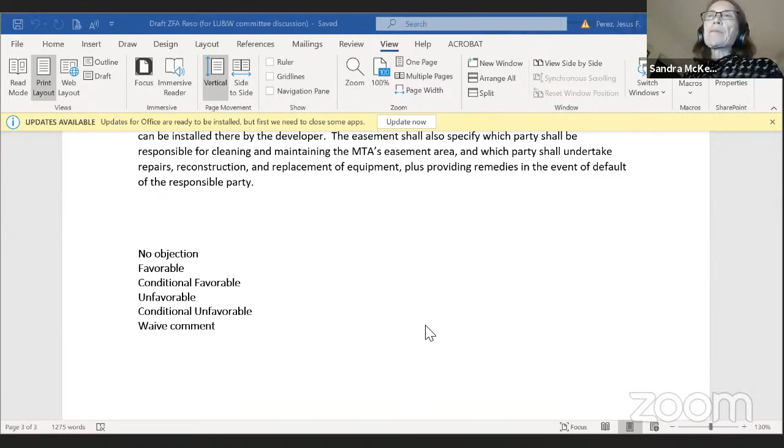I'm leaning toward what Wells is saying, although I was thinking conditional favorable. But before I let this go to any kind of a vote, I need to make a correction in the 8th whereas. I sent... Sorry, Larry. Let's do that later. We need to decide which direction we're going to take. And as a matter of fact, we might be able to even split this into two issues.

I think we probably don't have any problems with the easement portion of this, and that we could be favorable for that. But I think it's the second portion that Wells mentioned that we have most of the concern with. Agreed. Would that be something that we could move forward with? I'd have no problem with that. Wells, you have your hand up? Sorry, I should have lowered my hand, Sandy. If you were to agree with that, we could maybe make that a motion. Yes. So I agree with Larry. Okay. Is that something we can then move forward with?

We separate this, that we have no objections to the easement portion of this, but we're conditional unfavorable based on the second aspect of it, which is providing bonuses that could lead to merging lots. And sorry, I'm beginning to fade here, but Sandy, before we move that, DCP, are you guys okay with us submitting two? Are you talking about two different resos or one reso but two different aspects? I think it could be one reso with two different aspects to it, or we could separate them if that makes it easier for DCP and MTA.

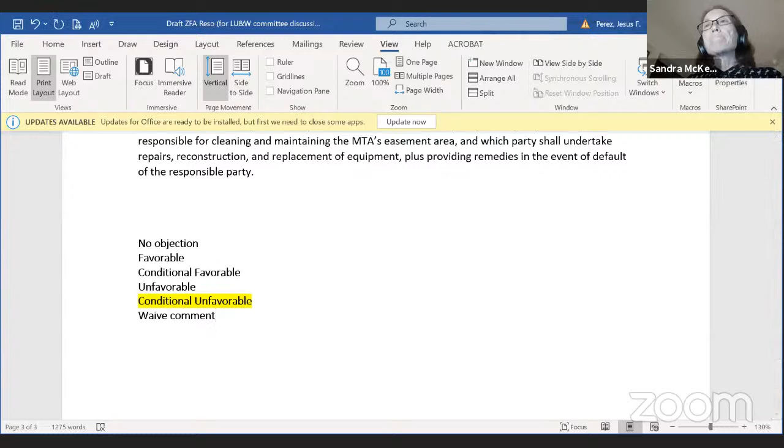Okay, and someone should move that. So moved. Do we need a second? Okay. And then Larry is going to modify the 8th whereas, and we will take a look at that when we go to full board. So let's vote on this now. One second. Putting a little bit of a reminder for myself. Great. All right, I will call your name. You will vote in favor of a conditional unfavorable resolution, opposed to a conditional unfavorable resolution, or abstain. Jim Collins

does not appear to be here. Adam Harkey. Abstain. Thank you. Molly Hollister. Abstain. Thank you. Kavitha Matthew. In favor. Thank you. Sandy McKee. In favor. Thank you. Wells Magali. In favor. Thank you. Gene Santoro. Abstain. Thank you. Larry Shire. Larry, you're on mute. I was on another screen. In favor. Okay, thank you.

And Seligman is here. Lou Sapersky. Lou, if you could unmute yourself, please. I'm opposed to this resolution. Okay, opposed. Thank you. Sandro Sherrod. Sandro? Okay. Hearing nothing. Letty Simon. In favor. Thank you. And Kathy Thompson. Favor. Okay. With 6 in favor, 1 opposed, 3 abstentions, this motion does carry.

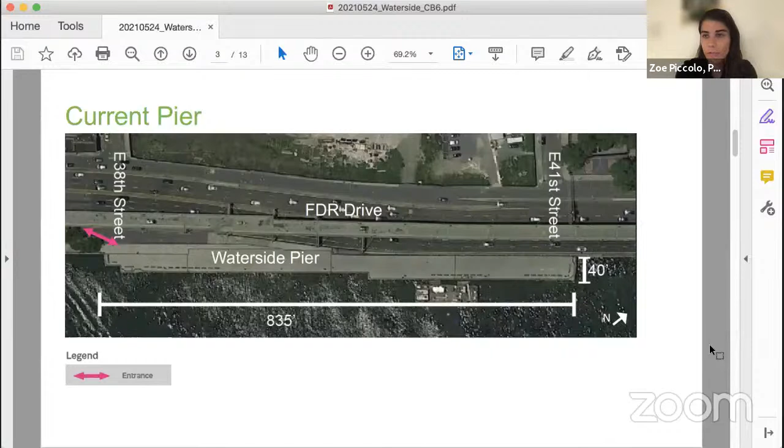So as mentioned previously, the inspiration for what we're doing out on Waterside Pier is from our Cool Pools initiative. Cool Pools has been this really great program where we've been able to go in and make it very cheery and fun and give new life to different spaces throughout the city. And what we're working with here, as you all probably are very familiar with, is the pier where there's one point of entrance and exit by 38th Street, and it's a fairly long, narrow footprint.

You all probably know the site very well, but just to provide some color for those who may not, the space is pretty open, sort of a blank slate right now, which is great and fun for us. There's great views, ferries pass often. The constraints that we're up against are that there aren't any utilities out on the site, and then the footprint is pretty narrow.

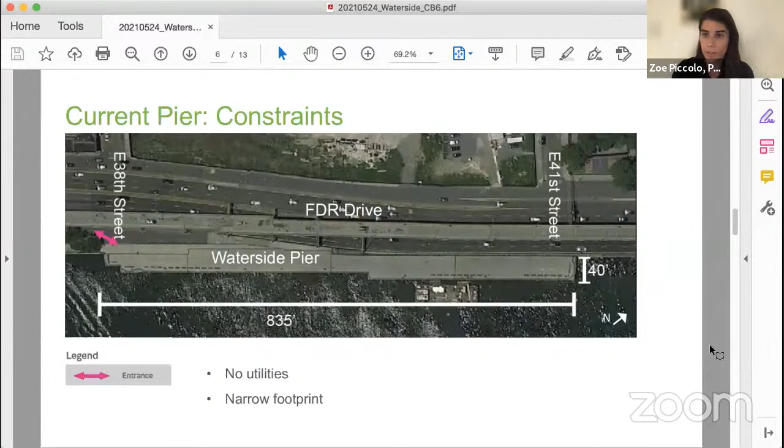We're looking to paint the surface and do something fun, cheerful, to add what we're calling area rugs of synthetic turf to make it a little bit more lively and somewhere fun to hang out. Some fence treatments to give a pop of color while also somewhat blocking the FDR, but not making it a very closed off space where you feel unsafe. Adding some metal umbrellas that are fairly low maintenance and provide some shade, as well as a pop of color and a vertical element too. Including picnic tables and paint so that we get that fun element as well.

And we're also trying to work with a company to see if they'll be able to provide adult fitness. We're not sure how that will move forward, but right now we're in conversations with some folks. So hopefully we can get something out on site, and we'll keep you all posted as that progresses. But for now, we're going to move forward with what Parks can do, which is hopefully something that you all are on board with as well.

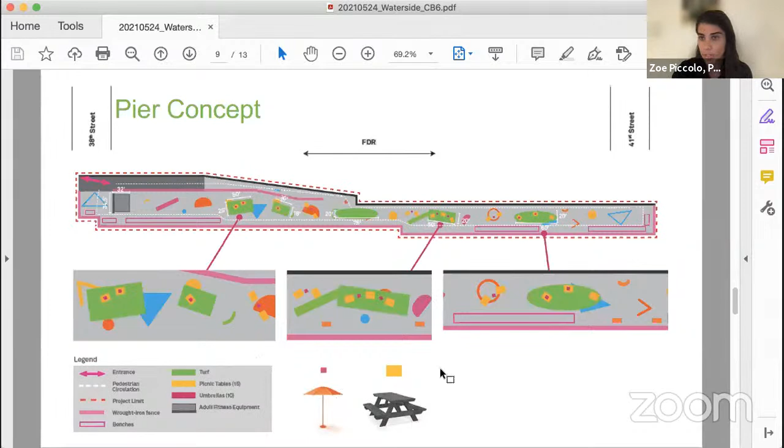And so we just wanted to let you all know that we are really excited that we are going to be moving forward with this installation this summer, summer 2021. So for installation, the pier will need to be closed for about 4 to 6 weeks. We're hoping to start kind of after 4th of July and move this forward. So with that, thank you, and I will open the floor to questions.

Excellent. Thank you very much, Zoe. So I'll go ahead and kick it off. Thank you for this presentation. Really do appreciate it. I have to say my enthusiasm for including the shade. I think it'll be a massive improvement, especially in the summer months, where the pier itself is very active, but on a hot August day, it leaves a lot to be desired.

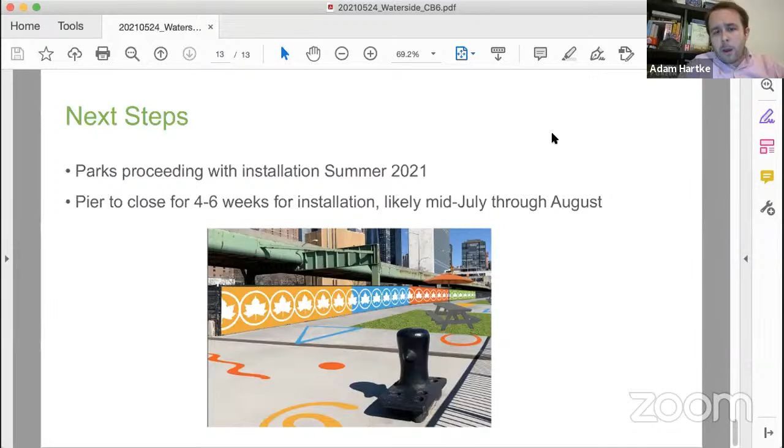Yeah, fingers crossed. I mean, for those viewing at home, this is a jurisdictional nightmare of 4 or 5, 10 different agencies. So any sort of progress is welcome, and for better or for worse, incremental. So thank you for being able to make some with this. Great. Okay, excellent. So with that, don't see any more questions. So thank you, team. We hope to hear from you soon on the outstanding questions that we had.

And maybe in September, I have a bocce set, and it might not have to be regulation size, but maybe see you all out there. We'll have our next meeting on the pier. Honestly, I'm very much in favor of that. If the rules allow, we'll bring it up at exec. Sandy is also in favor, so that's half the battle. Half the battle right there. Yeah. It looks like Larry would like the floor. Oh, I'm sorry, Larry. Larry, floor is yours.

Oh, you're on mute, Larry. Again, if you would take a quick look at the chat for some additional questions. Yeah, I mean, no, we're not supposed to use the chat. So if you post it in the Q&A, I'll ask the question. But I'm sorry. I'll repeat the most important. Well, go for it. With metal umbrellas, don't they attract lightning?

Hi, this is Parks Deputy Commissioner Mark Folk, Parks Chief Operating Officer. Metal umbrellas themselves, considering the high-rise environment we're in, are not likely to attract lightning, and they also will be grounded to the concrete deck. Okay. All right. Thank you.